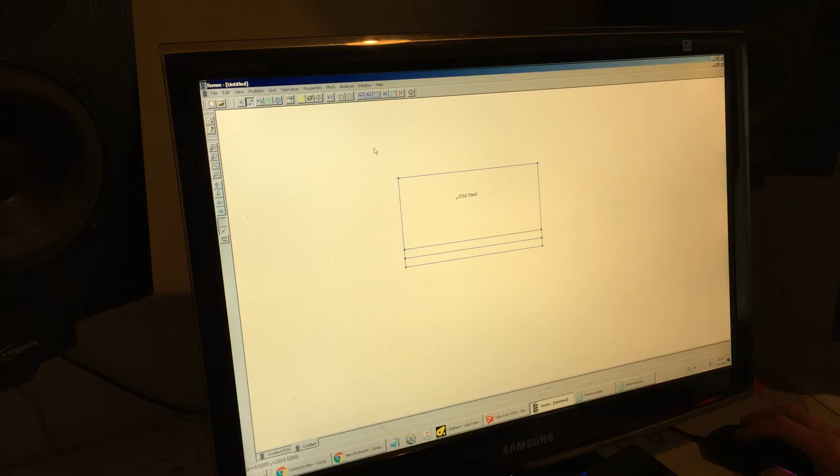But we're looking from the top, so we're looking like this. So what we see, if the magnet is here, is 1 millimeter thick. We're gonna connect the dots. So now we have one magnet here. I didn't declare it yet, but I'm gonna use 2 of them on top of each other. So 2 magnets. Then I'm gonna use the copy tool, but usually you have to think a lot to use it. It's also quite crappy made.

So I'll get the select tool, this thing here. Make sure you have the wire thing selected, because otherwise it only copies the dots. We're gonna select this block, going to edit, and then we want to say copy, and then you have to fill in how much it has to shift and copy it. So at least it's one time the thing itself, so that's 8, plus these two magnets, so it's 10. And it's in this direction, so it's minus vertical, minus 10.

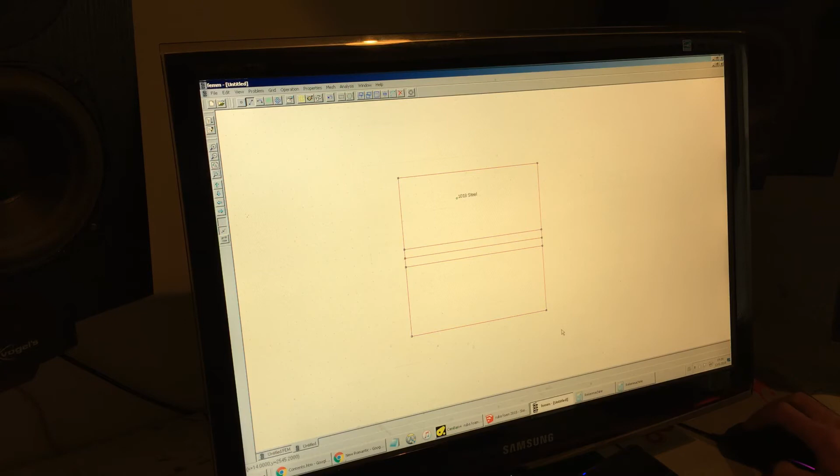Now hopefully I do this correct, because usually I don't. And this time I did, so that's nice. And now we're gonna copy this whole thing to this side. And then we have our complete motor. Edit, copy. Now we have to find out how much it has to shift. Well, at least 20 and then some. So horizontal shift is 20, and the gap, well, let's start out with a moderate 4mm gap. So we move it 24 millimeters.

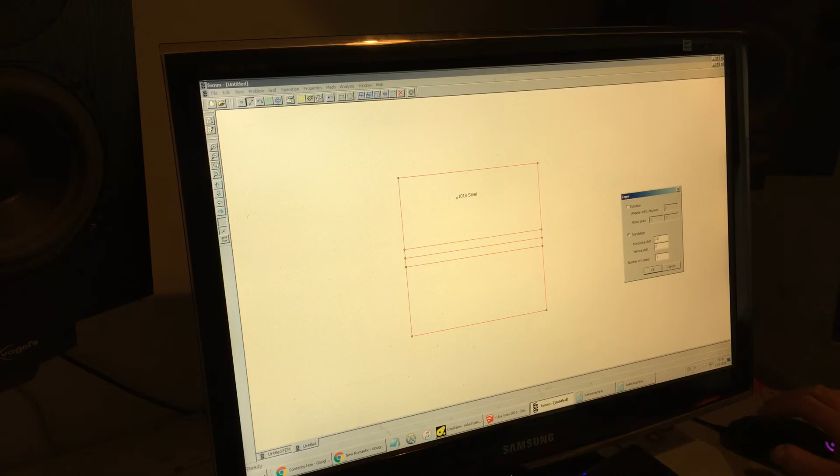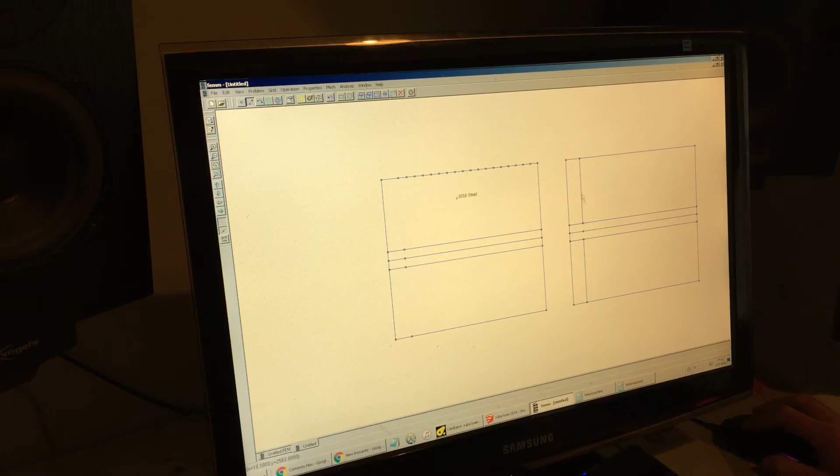1, 2, 3, 4, 5, 6. That's weird. Let's see if I made the steel wide enough. Let's zoom in a little bit. This is the reason why I usually place dots all over the place. 1, 2, 3, 4, 5, 6, 7. Yes. So I made it all too small, as usual, but we'll fix it. Up, up, up. You have to remove these pieces in between, otherwise it will flip. We're gonna do this here as well. So, is this correct? This has to go, this has to go. So we're back on track.

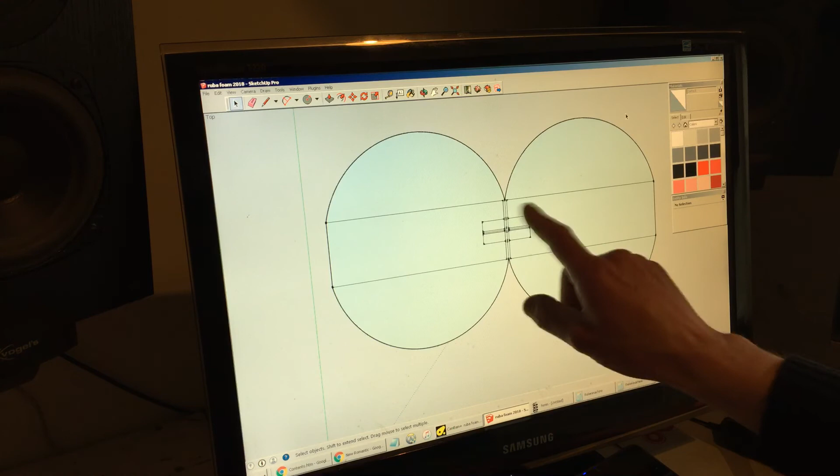We got a gap here of 4mm. This is where the coil is gonna sit, and it's a top view, remember. So actually I can show you sort of. So we're looking on top of the Rubanoide. This is the magnets that I drew in FEMM. Now I only gave this a material, this block here. It says steel, so we have to do it for the rest as well. This is also steel, this is also steel, and this is also steel.

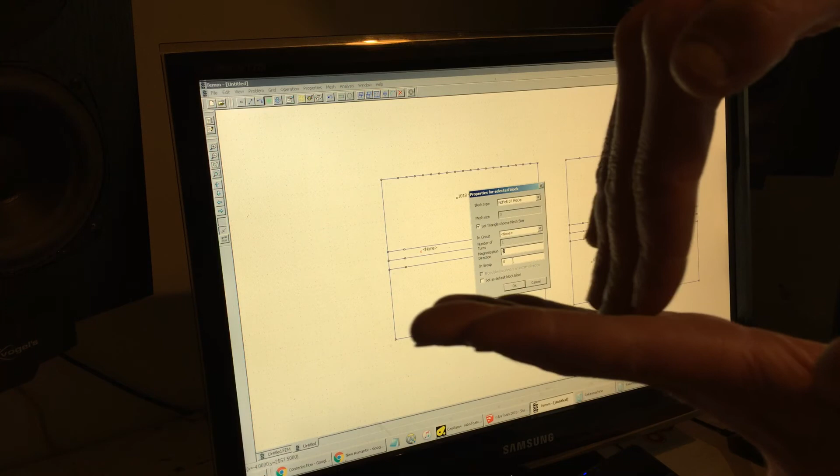Then we want to declare the magnets. And the thing is, the grid size is 1mm, so wherever I click I won't be able to put something in this magnet. So you have to change the grid size to 0.5, so I'm able to put something here. Then I select the magnet, neodymium, and then we have to fill in the magnetization direction, and in this case it's axial. So if this is 1mm, it's magnetized like this. So we choose 90. Oh, well, it's the other way around. It's pointing upwards, but it doesn't really matter.

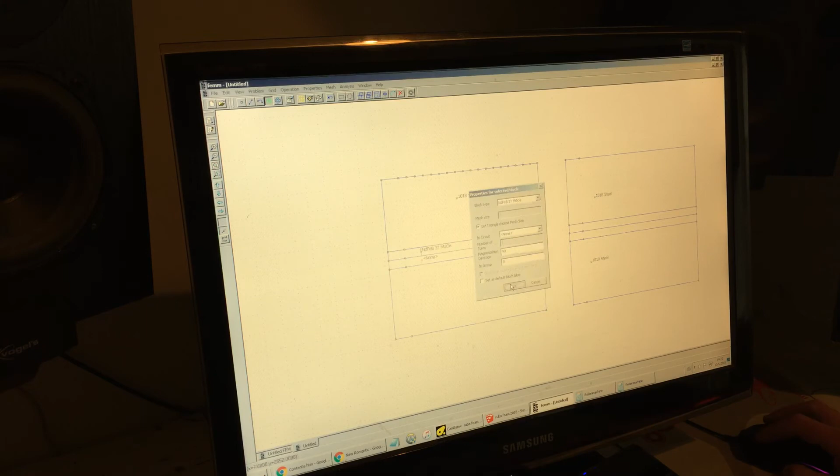We're gonna do this with this magnet as well. Choose its magnet, and then say 90 degrees. Now on the other side, here, we have to declare as well that it's a magnet, same magnet, but the direction of the magnetization, Jesus, hard word, it's not 90, but it's 90 plus 180, because it has to be the other way around, so it's 270. Oh, no, I selected both, that's a problem, so I have to pick something else and go back to the material thing. Select it with the right mouse again, press space. Magnet at 270 degrees. Bang. So we declared all our stuff, so that's a good begin.

Now we want to have the middle of this gap. So I'm gonna change the grid size to 1 millimeter again, because we want to know how much magnetic field is here. And what we're gonna do, we're gonna grab the point tool, the dots, and I'm gonna put a dot 2 millimeter in front of the magnets and 2 millimeter on the back of the magnets, and both exactly in the middle of the gap. So that's the first part.

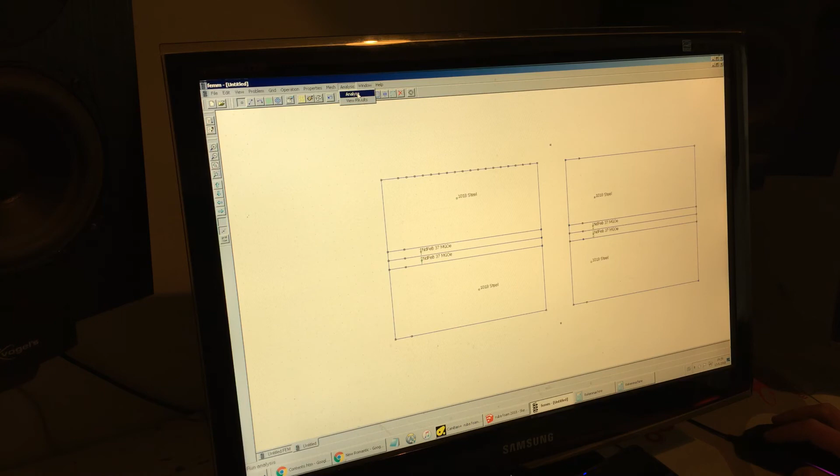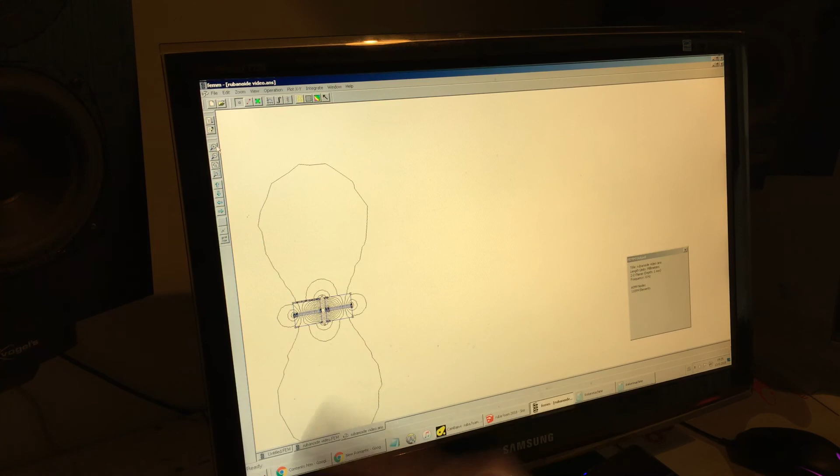Now you go to Analysis and then choose Analyze, and then we got a fault. Apparently I have to save it first. So save as Rubanoide video. Oh, that was rather quick. Then you go back to Analysis, View Results. We can zoom in again with the annoying zoom thing. You can scroll around with the arrows on your keyboard.

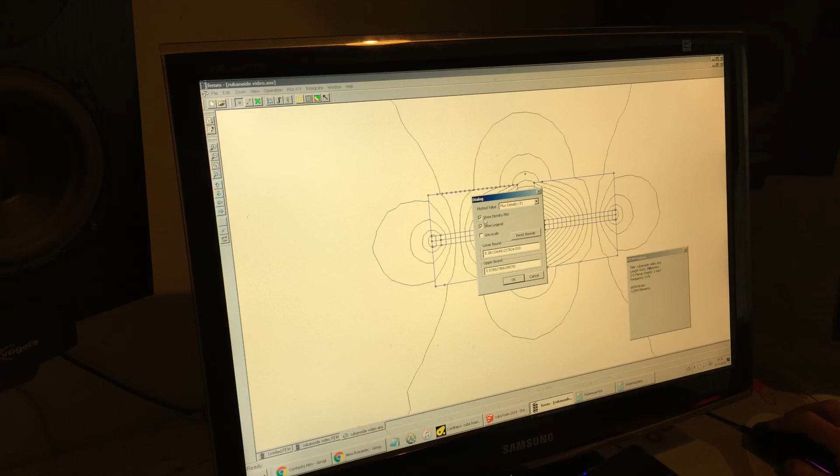So we see something, but not, well, it's not very useful. There's this colorful thing here, and then we choose Show Density Plot. Bang. Then we can at least see something happening in terms of where there is much magnetic field and where it's not. This is usually the picture you see when people post stuff from FEMM. So now you know how.

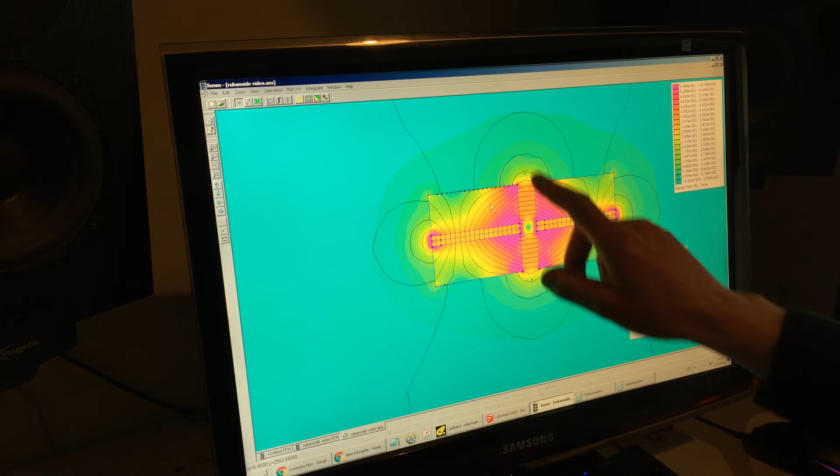Now what we're gonna do, we're gonna measure this between these points we put there earlier. And the thing is, you have to put them there already in the previous window. So that's why I did it there, but usually you will end up here and then like, how does it work? And the whole program is full of how does it work. Besides the dots, there's again a sort of line tool, but this time it's red. We select it and we connect these dots. We want to measure in between here.

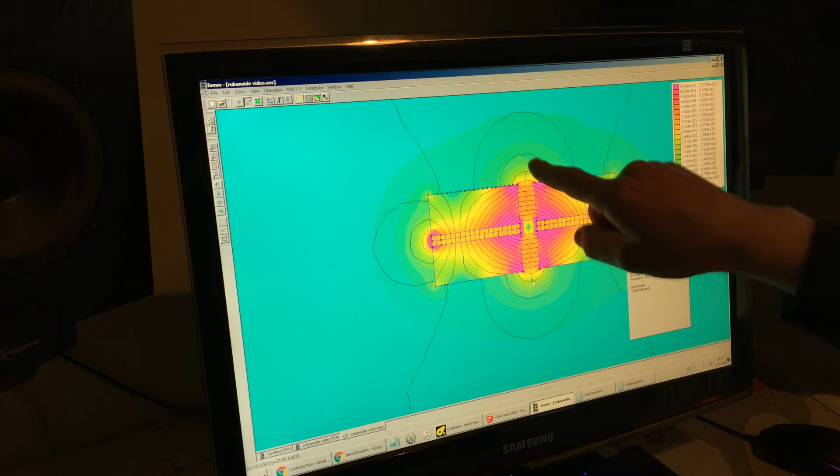Then we go to this XY thing and we choose plot type, we choose normal flux density. Number of points in plot, well, let's make it 500 for instance. Okay. And this is what we get. You can see the field is a little bit above 0.4 Tesla, and you can see when it goes to the middle it goes to 0, through 0, and then back the other way around. It's because these magnets were turned 180 degrees.

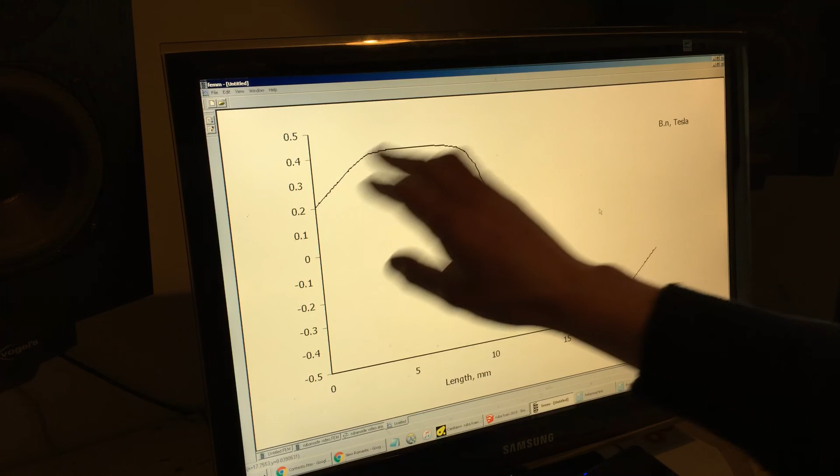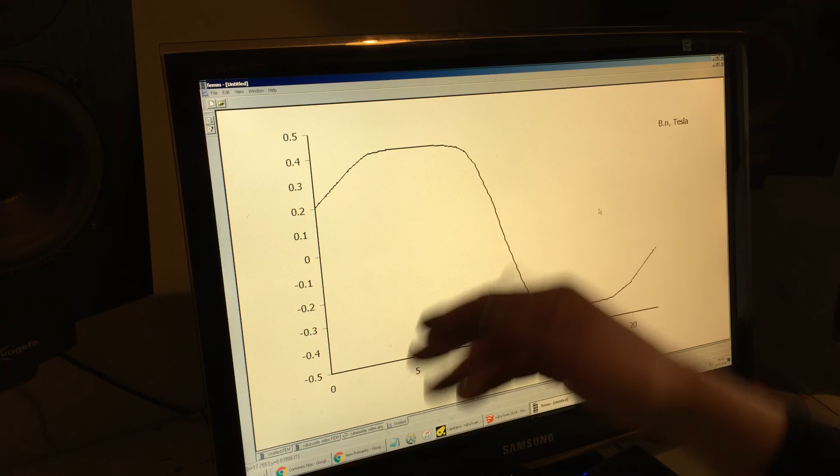But that's how they should be, because the coil is running up and down, and it's the left hand rule, by the way. I used the right hand rule in several videos, but I did explain it right, just the wrong hand, but the result is the same. Left hand rule. If the current moves upwards, for instance, then the magnetic field is in this way. But on the other side of the coil, the current moves down, so the magnetic field has to be in the other direction to have the same movement of the coil. Otherwise it would be pulling or pushing to each other, which is not going to result in any sound. So, a little bit above 0.4 Tesla, not bad.

So, and now we can tweak. You can leave this open. And we go back to the drawing, for instance, and select this whole thing. Be sure to have this wire tool selected again. And then I'm gonna move it a little bit. I want to have a gap of 3.5 millimeters, so I'm gonna move it 0.25 millimeters horizontal, but minus, so it goes to the left. Otherwise it moves the other direction. And I want this thing as well to move, but in the other direction, so just 0.25.

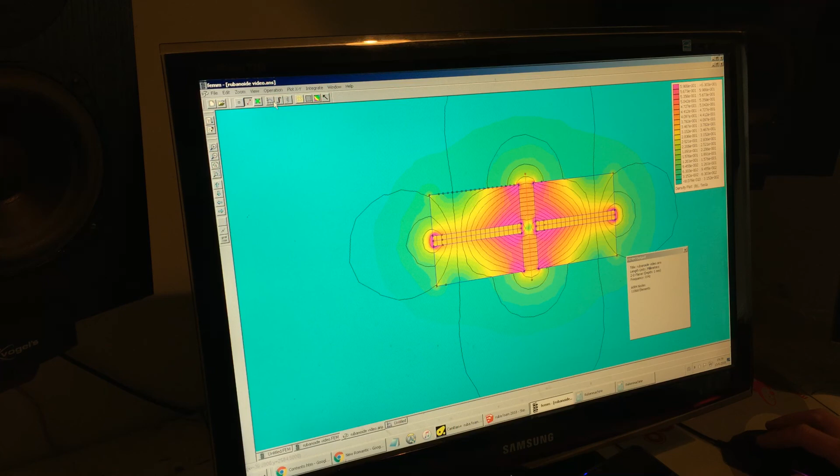Then we go back to analysis. I must think of a new word for that because I cannot pronounce it. And then view results. We're gonna select this thing again and look for the normal flux density. And now we can compare it. It's like a little bit more than 0.45 compared to around 0.4. So that's what we gain in just 0.5 millimeter. That's quite nice.

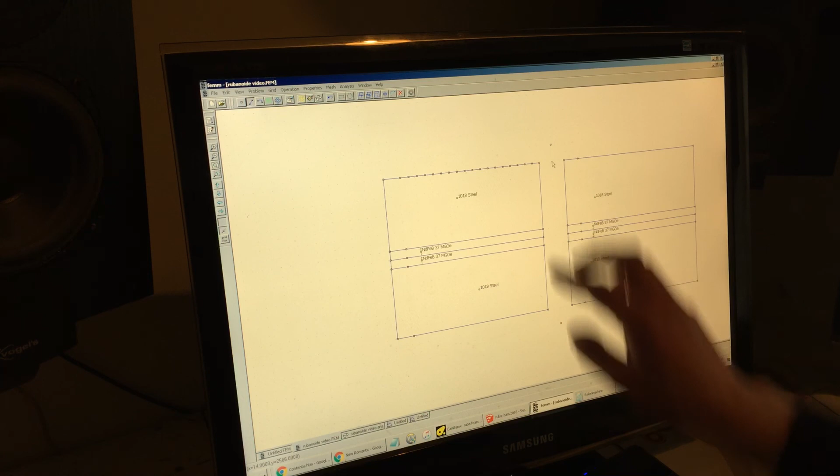Now you could make this gap, for instance, 2 millimeters, and it will be way higher. But the only thing is, if the coil is this length, well, it's gonna be smaller, of course. But if it's like 24 centimeters, it's quite hard to get it so flat it will fit in this 2 millimeter gap without touching. So that's a problem.

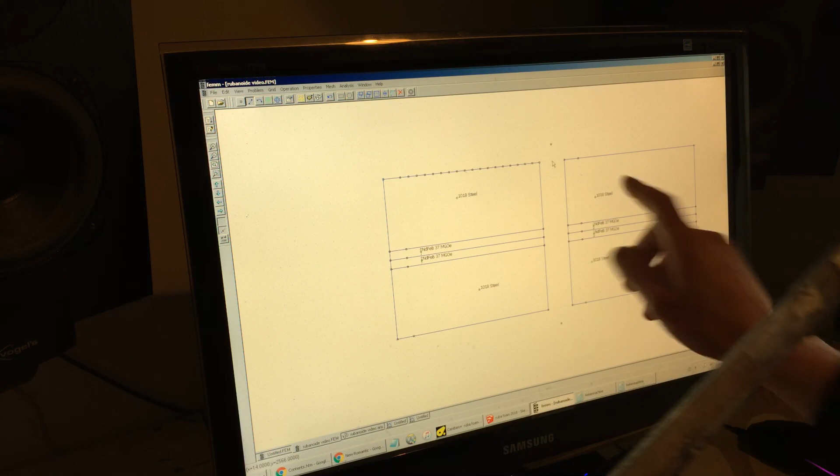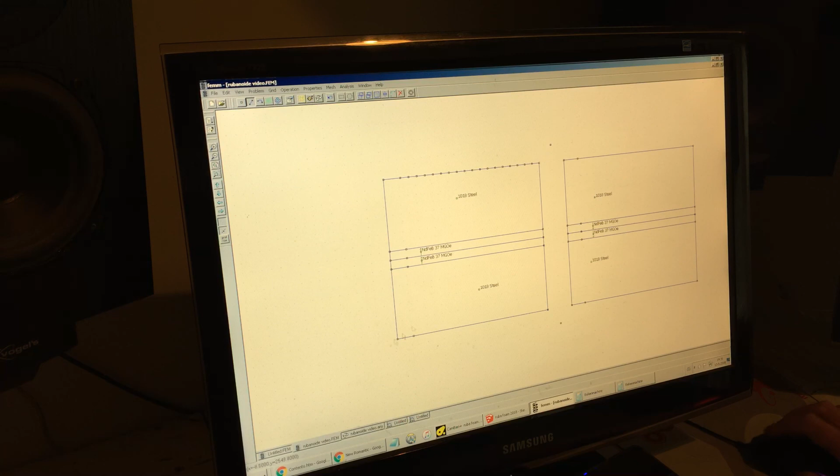And another problem is that although this is 8 millimeter metal, 20 millimeters wide, and there are gonna be 2 of these bars on each side, it's still quite likely if you make a gap of 1 or 2 millimeters, the stuff bends like this and snaps together, and it's pretty hard to get separated, and your membrane or your coil will be fucked when you want to get them off. So that's a very quick and dirty how to FEMM thing.

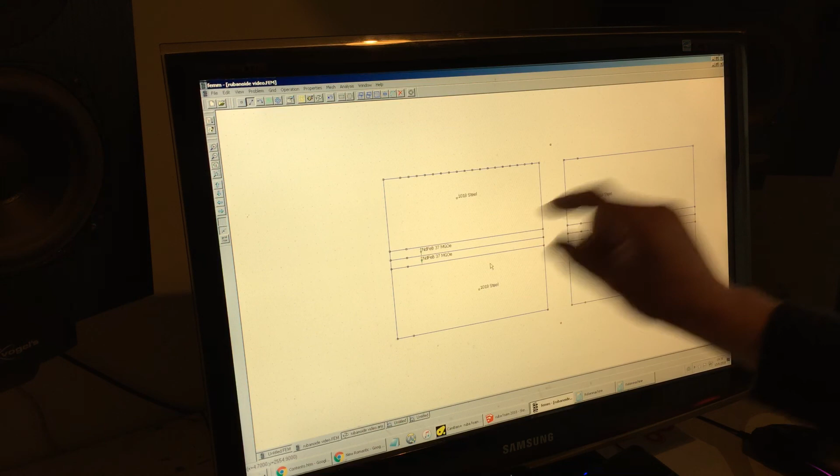But I think this is sort of the basic stuff. If you know this, you can model all kinds of weird stuff. You can model a ribbon, you can play with different kinds of materials. Like for instance, if this runs into a point, then the magnetic field here will be really strong. So you collect all this magnetic field and kind of beam it to this small area. You can do loads of fun shit, as well as the planars and such.

And you don't actually need to know the exact magnetic field strength of the magnets you got. If you're close or in the neighborhood, it's okay. You can see at least what's happening. So I'm not really sure I got 0.45 Tesla. Although in this case the magnets are, I think, this rating, so it's gonna be really close. But sometimes I model stuff while I don't even know the strength of the magnet, just to see what happens if you change something or make the gap bigger or smaller, or move the membrane further from the magnet, etc.

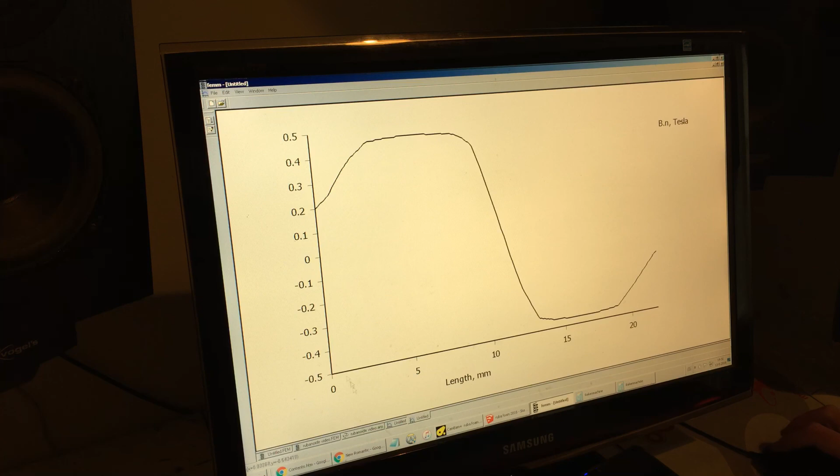So, quick FEMM guide. I hope you will enjoy, or at least can do something with it. I'm gonna draw in SketchUp some more Rubanoide stuff and decide on how many turns I want on the coil, etc. and what kind of material I'm gonna use to make the coil. And then I have to figure out where I put it on, but that's a third video, I think.